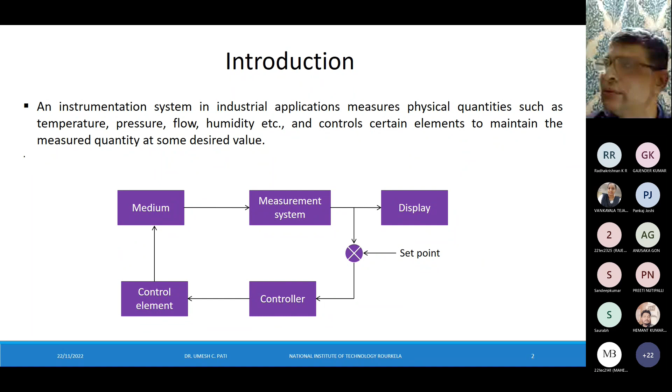So there are signal conditioning and signal processing blocks here. Two independent blocks, but most of the time we say signal conditioning or signal processing like that. But there is a thin line differentiating them. Every sensor requires either one or both: signal conditioning is mandatory, signal processing is optional. Why is it so? Let us distinguish between signal conditioning and signal processing, the thin line dividing both, and the functions under each head.

So signal conditioning provides operations, and as I told, it is mandatory. It transforms from one form to another form or level, so that subsequently we can interface with other modules. Common operations are amplification, filtering, isolation, scaling, and attenuation. The names are familiar to many of you.

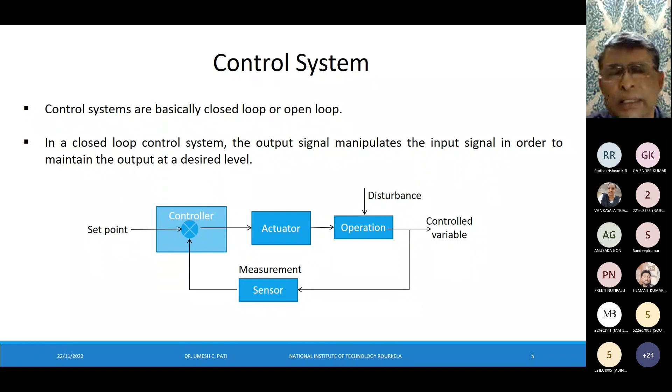This is the disturbance here, and we have feedback of the measurement through the sensor. Comparison is done at the controller, and correspondingly the appropriate, proportional action is given to the actuator. It is only for the disturbances that we do all the operations. Without disturbance, nothing would need to be done. Once you set a variable at a particular point, it would stay indefinitely. But practically this is not the case.

Just an example of what we are going to do. I'm discussing the gradual upgradation from normal industrial automation to IoT, to industrial IoT, and then what is the role. In between, I also discuss the sensors, the classification of sensors, and actuators at the end.

So here is an example of that: a heat exchanger. Almost everyone in this domain knows this. We have got a process stream which has to be heated with the help of the heat exchanger, and the medium is steam. So steam will be used to increase the temperature of the process stream.

Here, as usual, there is a sensor at the beginning, a transmitter, and processing to make it compatible to be sent to the controller. Here is the controller. Different types of controllers can be here, and recently the PC or computer has replaced all the earlier controllers.

We have got a steam flow, and this is the final control element here. Here is a valve. So this process is simple. The valve has to be increased or decreased depending upon the temperature of the process stream, so that the flow of the steam can be controlled through the valve. So naturally, the valve is a final control element or actuator.

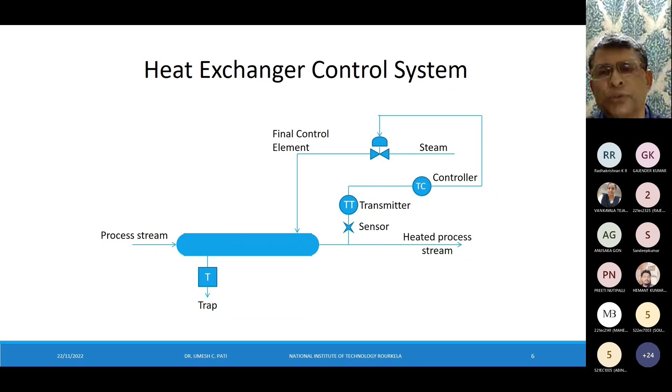And as you have understood, the sensor is the primary element, the transmitter is the secondary element, and the controller is the brain of the control system. All the decisions are made here, and the final control element takes the action. It is just like a slave to the controller. Sensors are just like our 5 senses that we use to assess the environment. Our hands and legs behave like actuators. The controller is the brain.

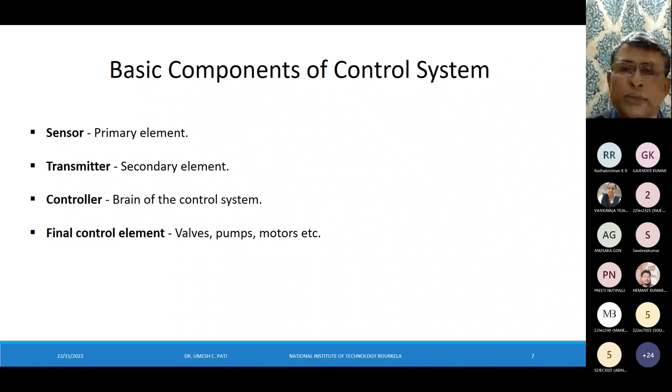So the minimum basic operations are: measurement, measuring the variable to be controlled, which is a combination of sensor and transmitter. Whether it is a simple system or a complex recent system, even with the gradual involvement of IoT, the basic operations remain the same. Then decision: the controller decides what to do and what not to do so that the desired value is maintained, and based on the decision, the action is taken by the final control element.

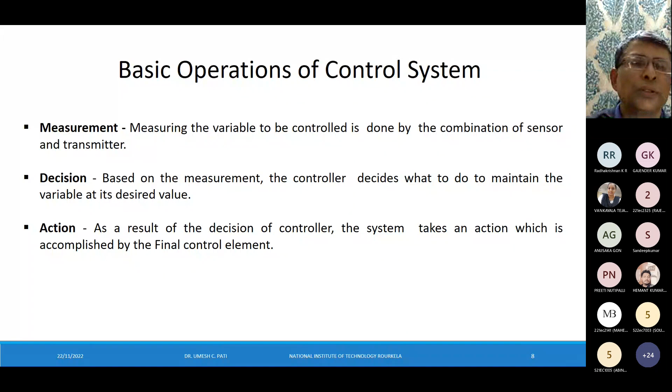And the terms which are important in this aspect are: controlled variable, the variable to be maintained or controlled at some desired value. In the heat exchanger example, this is the temperature of the process stream. What is the manipulated variable? The variable used to maintain the control variable at its set point. The flow of steam, the quantity of steam, is the variable we can control so that the process stream fluid can be at its set point.

Then, as I discussed, the set point is the desired value of the control variable, say 35 or 40 degrees centigrade for the process stream fluid. Disturbance or offset is the variable that causes the temperature of the process stream to deviate away from the set point of 35, to 37 or 38. Then we have to bring it back to the set point of 35 degrees centigrade. These are the 4 important terms associated with any control system, any automation system.

This is a little bit of initial-level discussion. Then we go over to industrial automation. Now the PC has replaced the controller in all automation processes, and it is combined with networking. In that case, a wide range of industrial measurement and control problems can be solved. With this combination of network, data acquisition and control, that is networked industrial automation, we can handle automation of process industries, manufacturing industries, buildings, locomotives, automobiles, avionics and whatnot.

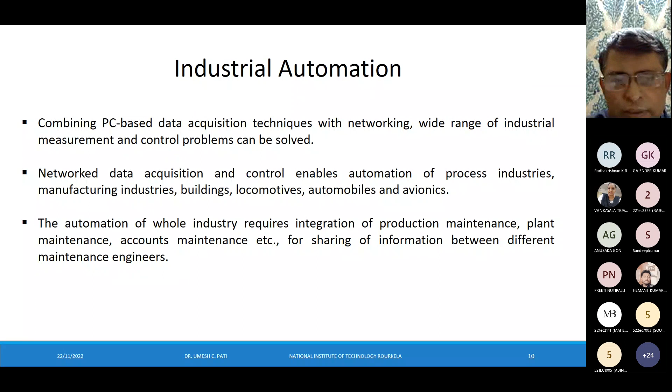What does it require? It requires integration between different levels and different domains of a complete process plant: production maintenance, plant maintenance, account maintenance. All these different domains should be interconnected, and we need this sharing. Then what is the hierarchy model? In this hierarchy model, we require flow of information between different levels, from the field device level, the lowest level, up to the enterprise level, the highest level. I shall discuss the levels later.

In fact, we shall discuss IoT and also industrial IoT. All these changes have occurred, but the basic things remain the same. So there is a 5-level hierarchy in industrial automation. The hierarchy model describes what equipment is required, what network is to be used, how communication between the equipment can be established, what the quantity of information flow should be, and how control can be achieved. So what are the 5 levels of automation? This is the communication hierarchy.

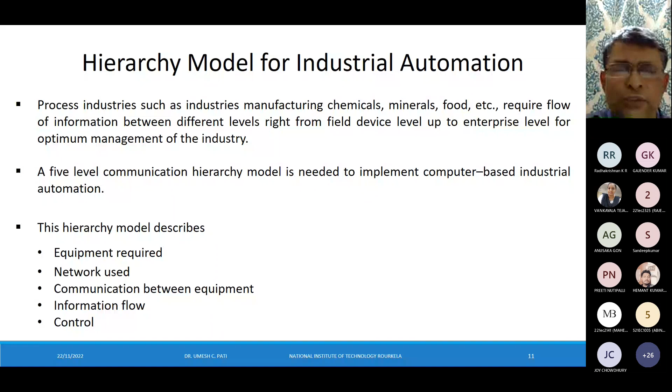See at the bottom. So there are sensors and actuators. They are at the field level. They are the soldiers, workers in a process plant, scattered across the industries. Then after that, there is an IO level, input output level. Third one is the control level. Fourth one is the HMI level. I shall explain this one. And last one is the enterprise level.

We need information flow, communication between all these levels, so that, as I told at the beginning, product quality, product rate at minimum cost, and safety can be achieved. So the 3 points which I have told at the beginning, this is the major reason why we are going for all these businesses.

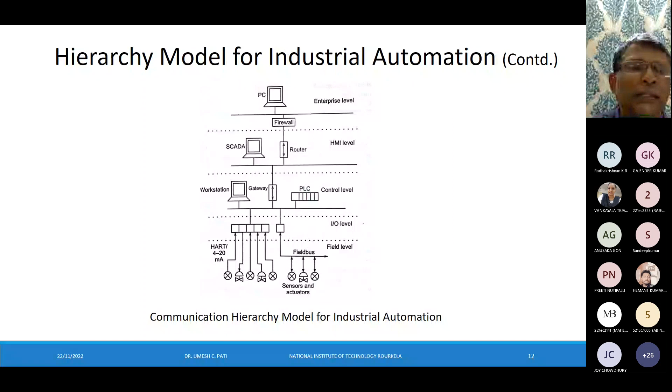So as I told, the initial is the field level. Then IO level already I have told, and HMI level, it is plant management or human machine interface level, HMI. Also it is called plant management level. Some management is occurring. In fact, all the names satisfy their nomenclature. We shall discuss about each one. And last one is the enterprise or corporate level.

So what are the basic functions? As I told, even if we graduate over IoT, industrial IoT, there will be minor changes, but basic construction, basic function will remain same, and levels basically will remain same. So first of all, as we discuss, this is the field level. It is the lowest level in the automation hierarchy. And what are the equipments? It is field instrumentation, that is sensors and actuators, workers for process measurement and control.

So these sensors generate process variables. And what are the process variables? Temperature, pressure, level, flow. There are many more. Major ones are temperature, pressure, level, and flow. And these signals received by the sensors are passed to the input output level. This is the job of the sensor. They pass on the information to the IO level.

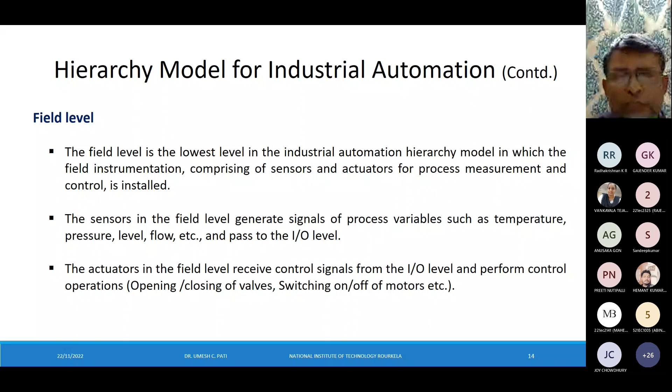Then IO level, input output level. Main function is that it's a buffer interface between control level and field level. It collects input signals from sensors and transmits to the controller. A little bit of processing is supposed to be there. Then the reverse way: collect control signals from the controller, that means the third layer, control layer, and pass to the actuators.

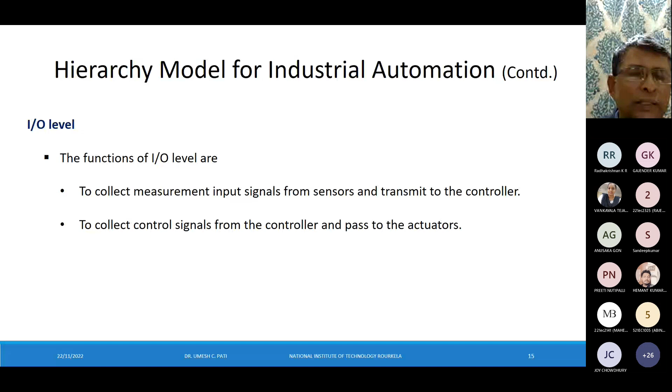Then the more important segment, control level. The inputs from the sensors are processed and control signals are generated. Main decision making is being done here. A few examples are PLC, distributed control system, and now the PC has replaced them. So data from all parts of the industry is collected and presented to the computer. So as I told, this is in-process control. That is control level.

In fact, for small industries, these 3 levels are the minimum, to reduce the cost. But for big industries, like the Rourkela steel plant here, we need 2 more. What are the 2 more? The next one, 4th one, is the plant management or HMI level. In this plant management or HMI level, it collects plant data from the control level. All the data are being collected here. Mark the words, human machine interface or plant management.

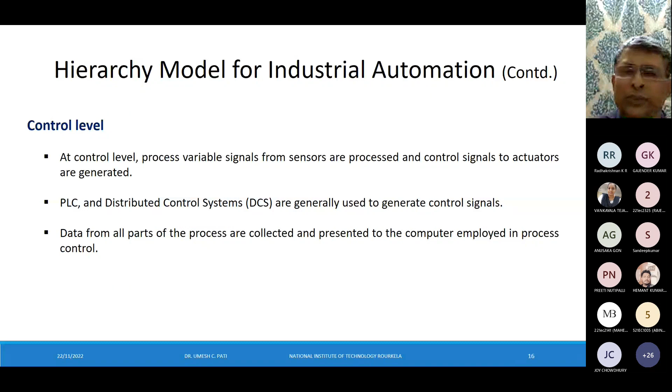An example of that is SCADA, supervisory control and data acquisition. This program displays the plant schematic, that means all the variables on the monitor screen in the control room. So the operator can sit there and have a look over the status of the plant, all the variables on the screen. What it displays are process variables at different field points, not only a single point, across the process plant, and also it gives a warning if some threshold value is exceeded.

That means pressure goes above the upper limit, which can give rise to accidents. So all these things have to be done and displayed in the HMI level. The operator will be able to know everything. That is the reason why it is named the human machine interface level.

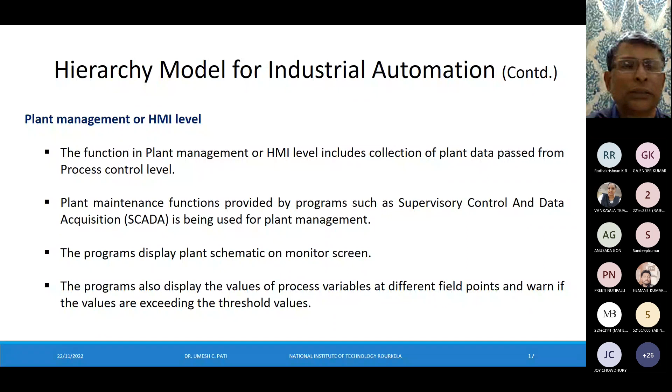The last one: we have our product. It is of best quality. Rate is good, but we have to market it. We cannot keep it in our store. So this is the place, enterprise level. This is the office management world. That means it will be accounts and sales.

So in that level, what are the things we require? Spreadsheet, text editor, emails. So that is what the job is there. So that is the 5 hierarchy model for the automation. And here, as I told, 5 levels are necessary for large industries. And the ability of different networks is also different, and it can be classified to data network and control network.

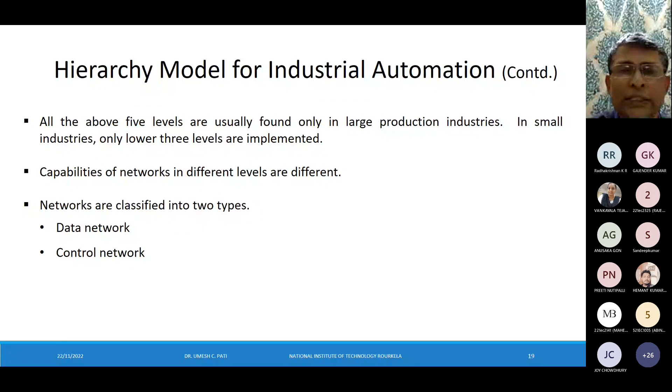Let us distinguish between data network and control network. So data network, in this case, data transported is huge in volume, but not time critical. Time criticality is not there, but amount of data is too much. And the network is used intermittently. Where this can be used, let us say enterprise level. So you can send a lot of volume of data, but sometime here and there will be okay. And it is also not continuous basis.

In contrast, control network, amount of data is less, but it is time critical. That means it is the control signals which are being sent to the actuator. And it is time critical, amount is less, and the network is in constant use. A particular variable is constantly monitored and controlled. Example, temperature. So that is data network and control network. So basically this structure remains same for all.

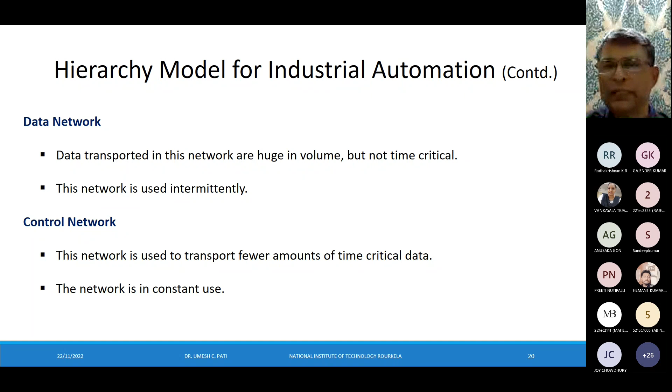Then we come over to the step ahead. That is the inclusion of Internet of Things. I shall just give a bird's eye view, glance over this, because we are having a gradual transition to the recent automation process. So these days, IoT has become a buzzword. So billions of people buying mobile devices, and it gives rise to immense processing power, storage ability, capability, and knowledge.

So all sorts of physical devices can be interconnected by IoT, like appliances, vehicles, even human beings, with the help of sensors, actuators, and software. And that becomes a network. And in this process, the physical devices communicate, interact, process, and exchange all the things they are supposed to do among themselves. And this technology supports that.

So what is the IoT definition by IEEE? It's a self-configuring and adaptive system. And it consists of sensors and smart objects to interconnect all the things. And by doing that, what we achieve? These devices become intelligent, programmable, and more capable to interact with humans, human-machine interface. That is what the ability will increase.

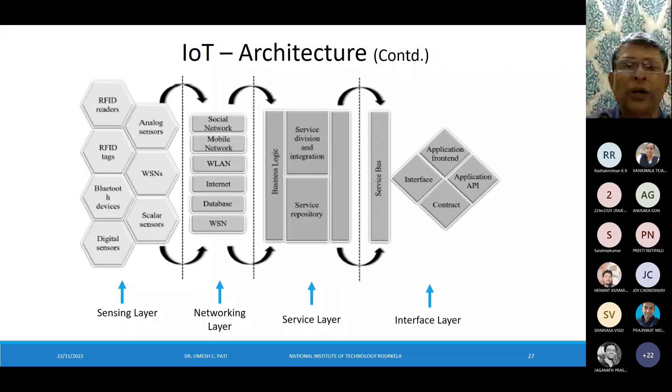So as I told, heterogeneous devices have to connect. The layers of IoT: sensing layer, networking layer, service layer, interface layer. So let us discuss a little bit on each layer briefly and have a look at this IoT architecture. Sensing layer has got few devices. Networking layer has got few. Then service layer, then interface layer. Let us discuss with reference to this sketch these different layers of IoT architecture.

So the word is sensing. Nothing new to us at this time. So it has got IoT devices. Already I have discussed about the field layer. That is almost similar to that. So IoT devices are equipped with sensor nodes. All the devices, what is there in the sketch? We have just discussed Bluetooth devices, scalar, analog, digital, all sorts of sensors are there.

The sensor node has the same function as the sensor has to do: sense the information, transmit it real time, and communicate among themselves. It consumes low power and does not require much data rate connectivity. Here the sensor nodes form the WSN, and based on the application, the sensor nodes can be grouped together.

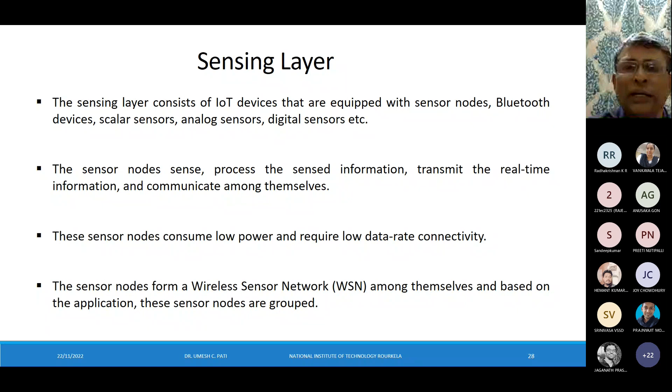Then the next one is the networking layer. This layer helps the IoT devices to share the information, and the amount of data generated at the lower level is handled by this layer. It consists of social network, mobile network, wireless LAN, internet, and database.

It should have low latency. It should give rise to scalability. These are the requirements of IoT applications. We should take care of bandwidth requirements, energy efficiency, as well as security. IoT security, in this case, comes in.

The service layer integrates the services and applications, and mainly it operates on the overall workflow: information exchange, communication, storage, and management. Also in this layer, one important task can be done: predictive analysis. We can predict different aspects of machines and devices.

The next one is the interface layer. As you have interoperability, different types of devices are there, and interaction has to be among themselves. Day by day it is increasing, it is not static. The more devices we have today, it increases, and that creates difficulties in connecting, communicating, and operating. This layer systematically streamlines the management and interconnection. So basically, these are the layers, giving a little idea about IoT.

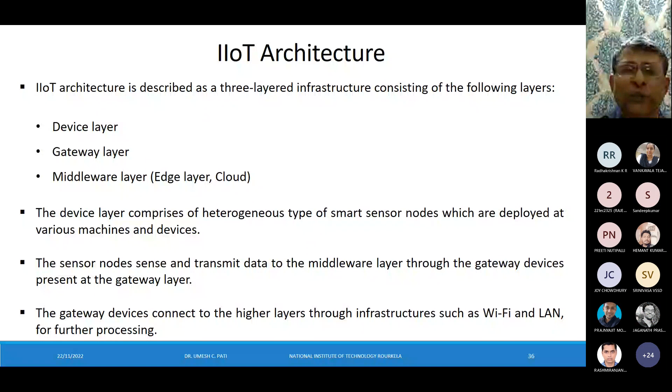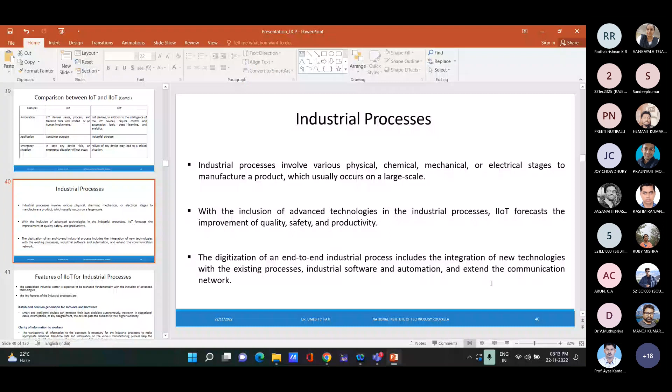So we have discussed industrial automation, then IoT, then industrial IoT. Let us discuss a little bit of industrial processes. That means it covers all the ranges: physical, chemical, mechanical, and electrical. All the processes have to be combined together for a product, as I have told, on a large scale, at a certain production rate.

In these cases, industrial IoT, everything again it sticks: product quality, safety, and production rate. As I have told at the beginning, whatever things may change, these three factors remain unchanged.

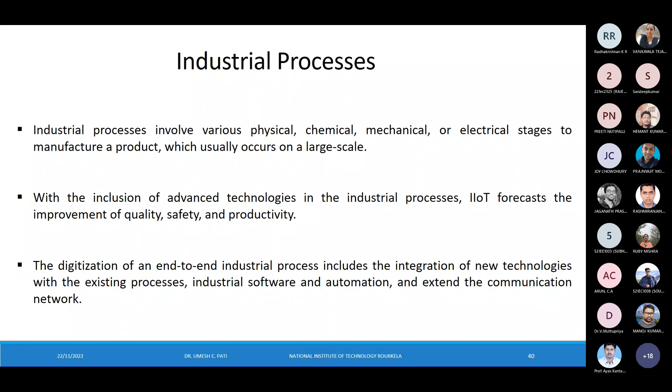So what should be the key processes and features of industrial IoT? First, distributed decision generation for software and hardware. Smart and intelligent IoT devices can generate their own decisions autonomously, and in case of interruption, the decision of the higher level may be needed.

Second, what is required for industrial processes involving IoT is transparency of information to the operators. Real-time data and information on the various manufacturing processes helps the operator identify errors, malfunctions, and degradation in the processes.

Then the word interoperability. A lot of devices from different manufacturers are used here, including sensor nodes, intelligent machines, and people. They should be able to communicate, transfer, and connect with one another using a standard communication protocol.

And last, technical assistance. It will help the operators to make decisions independently with minimum or no human intervention.

So industrial IoT connects the industries and other organizations with the help of internet. This is the future architecture, various layers of a futuristic industrial plant. Have a look at this.

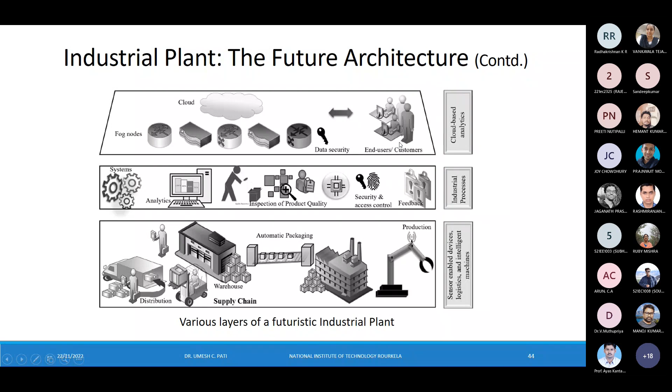The layers are connection layer, conversion layer, cyber layer, cognition layer, and configuration layer. A brief outline of the functions has been mentioned here. Let us have the detailed description now.

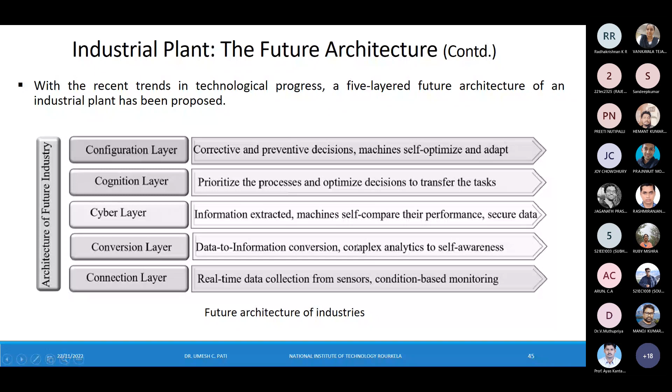So the first one is the connection layer: the sensor node, machine, and other physical devices, connected through internet. Earlier we discussed actuators and sensors; here it's almost the same, and the operation is also the same.

Continuously monitor the autonomous operations, in normal as well as hazardous environments. The main concern is that health hazards can be checked.

Then the conversion layer, almost similar to the earlier case: extract meaningful information from the collected data. From the first layer it collects the meaningful information, and then does complex analysis of the data. How does this help us? Estimate the health of the machines.

How long it will operate, and in fact the lifetime also. So health of the machines, predict fault also - from the history, from the previous assessment, it can predict. Then forecast the remaining lifetime of machines. This is the important task, health monitoring - status of the health of the machines, all sorts of business it has to do in this layer.

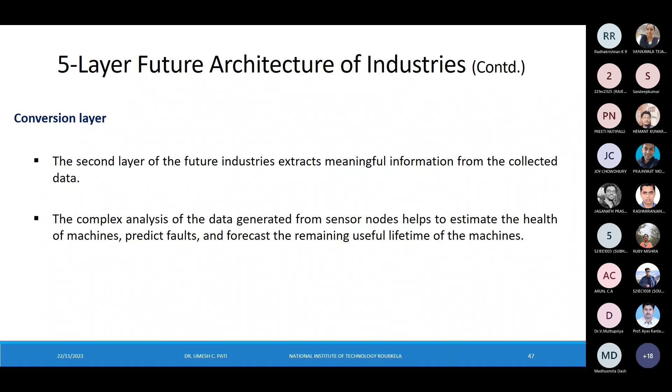Then the cognition layer: diagnostic and decision making. In this layer, complex analysis, remote monitoring, and integrated simulations are supposed to be done. The analysis helps us to prioritize and optimize the decisions.

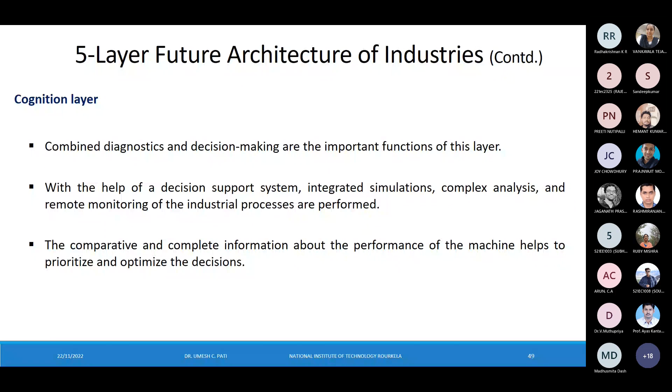Complex analytics applied here can predict faults and downtime. It also has important applications to predict market analysis and future demand of users, forecast new business opportunities from market trends, and how we can improve the product.

Let us come over to industrial sensing. As usual, monitor and control. Actuators combined together, monitor and control.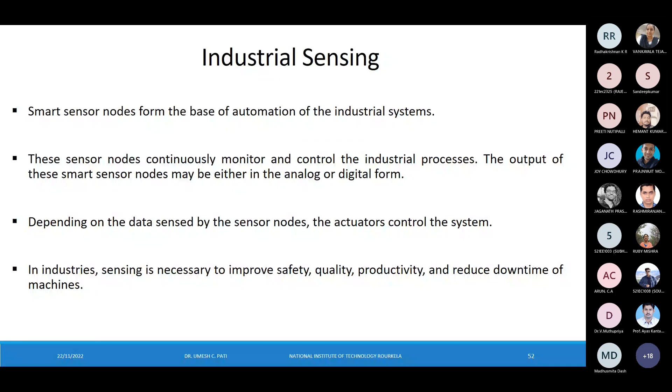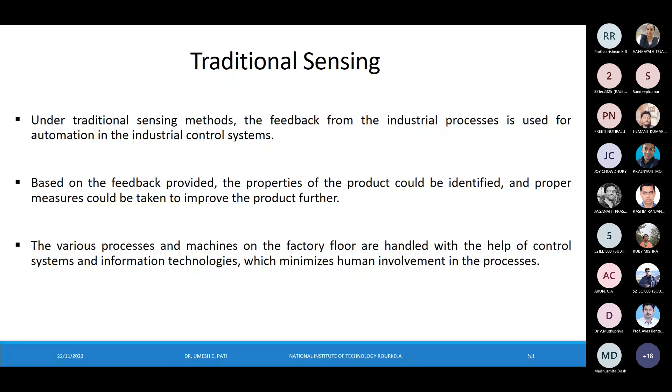Then traditional sensing, a little bit developed. The things are the same but a little more developed compared to previous cases, which again minimizes human involvement. An example is robots can be programmed and deployed to perform tasks in hazardous conditions. In these cases, the initial cost of automation is relatively high.

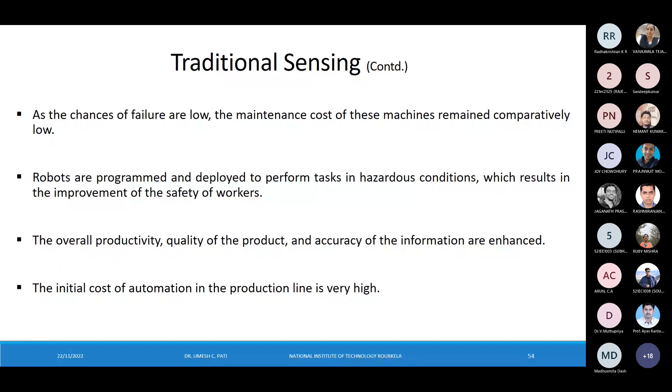A bit of development further, contemporary sensing involves smart sensor nodes connected to the internet. Terms like cloud and edge of the network come into picture. Here the analysis helps with product lifetimes, safety condition improvements, and reliability. In these cases, wireless technologies are important.

In this particular context, the smart sensor node has a microprocessor at its core. Smart sensor nodes also minimize power consumption, and can delete data at periodic intervals to save memory space. Smart sensor nodes are small in size and can handle large amounts of data. These are the plus points of smart sensor nodes.

A definition of the smart sensor node can go like this: it gives a specific output when interfaced with the hardware, and it can also range and calibrate data through a system, autocorrecting. Everything can be on its own. It transforms real-time data into a stream of transmission, and the gateway helps in this process.

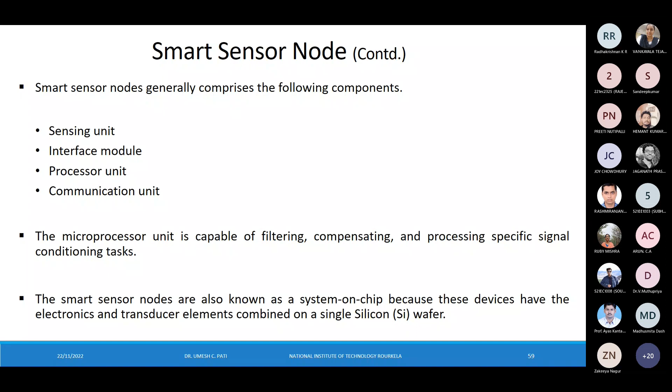Healthcare: ECG, EMG, oxygen saturation, galvanic skin response. Retail: proximity, RFID, GPS and light. Supply chain: motion, temperature, humidity, acoustics. Manufacturing: smoke, temperature, pressure, and proximity again.

Let us discuss a bit the application of these sensor nodes in all these 5 important domains. First of all, agriculture: these applications are used to monitor and automate the agriculture process, monitor as well as automate. It can also decide the amount of fertilizer and pesticides etc. to be applied, and overall, like machine health, it will decide crop health, what is required for steady health and steady growth of the crop. It can also tell the farmer the best time of cropping.

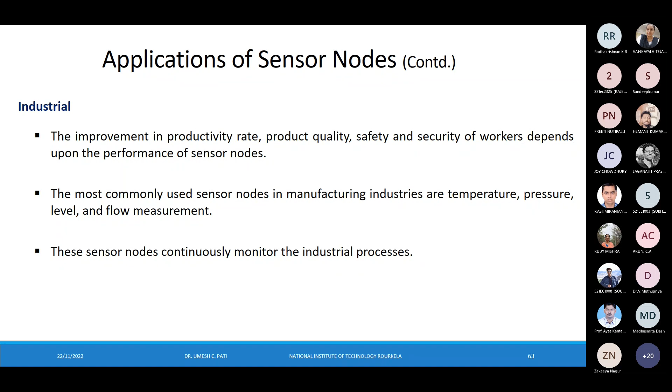So monitor and track logistic and related activities, and it will help us in all the marketing activities, optimize supply lines, and also avoid theft or misplacement. So sensor nodes will avoid misplacements, and overall it increases the efficiency. We can also have proximity sensors, vibration sensors, RFID tags in this supply chain.

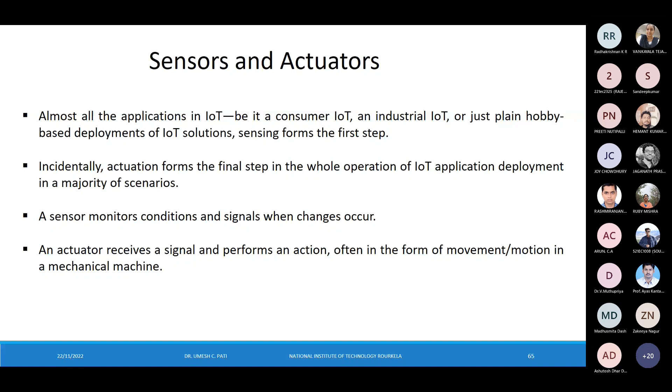Then let us come to different types of sensors and actuators. This is the last segment of the discussion. So whether it is IoT, consumer IoT, or industrial IoT, we have discussed that sensing is the first step and actuation is the last step. We have discussed sensors and actuators earlier, so already we have discussed these things. A few lines about the sensors.

So characteristics of the sensors in general. First of all, sensor calibration. This is to remove sensor errors. Inherently some sensors have errors from design. The error is how much the expected value is and how much the output value is. The expected value can be obtained from an ideal sensor under the same operating conditions, which is perfectly ideal. So in that context, we can enhance the accuracy of

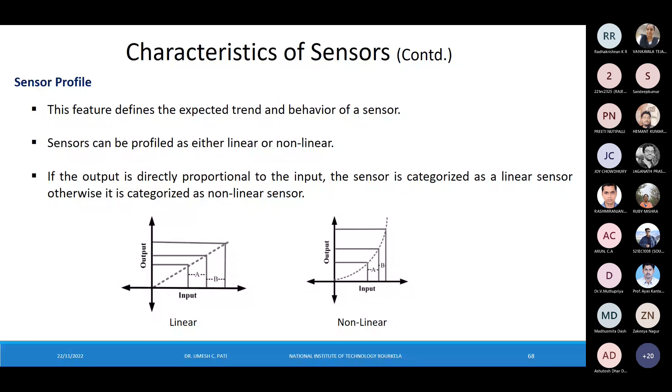The accuracy of the sensor. In fact, the degree of correctness or closeness a sensor can quantify. If the actual reading is 100, and one gives 99.5 while someone gives 103, then the earlier one is more accurate. Sensor resolution: the intensity or level of detail it can capture, 3.25 in comparison to 3.32. So it has more sensor resolution.

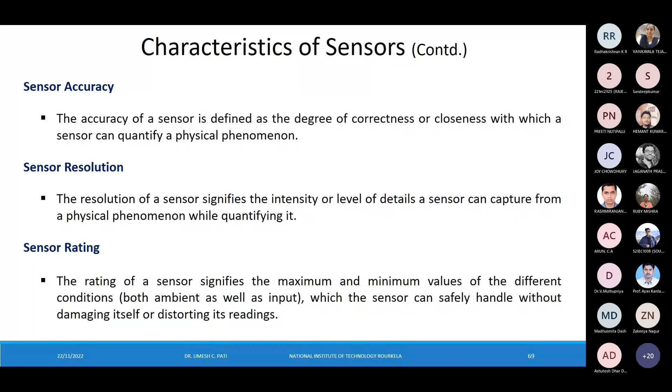Rating: the maximum and minimum values of the different conditions which a sensor can safely handle. If the rating is up to a maximum value of 200 degrees centigrade and it goes beyond that, there is every possibility that it will damage the instrument or malfunction and not give the reading accurately. Many of these sensors are supposed to operate in a particular voltage range. If we exceed that, there is every possibility of damaging the circuitry, knowingly or unknowingly. If there is any impulse or something else, there is a possibility of damaging this.

And output, the last one. It can be analog or digital. We have already discussed analog and digital, nothing much to tell about that. Then another classification: power requirements, sensor output, or measured property. A little bit more discussion on that.

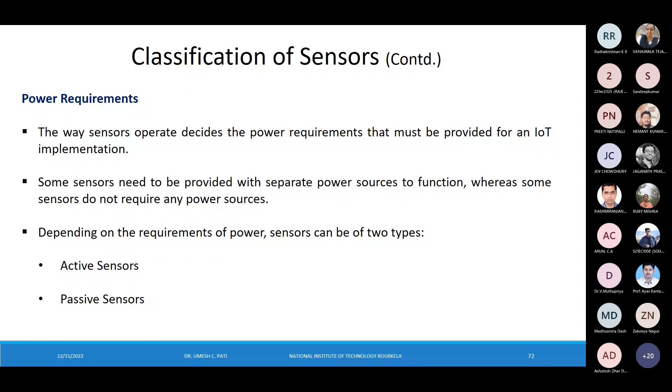Power requirements. Some sensors need a separate source of power, whereas some sensors do not. Based on this power requirement, they are divided into two categories: active sensors and passive sensors. Active sensors do not require it. That means they can work independently on their own, converting one form of energy to another, like a photodiode, as in the example given. Passive sensors need it; otherwise they cannot operate. The example is a thermistor, where an external voltage source is required to measure the resistance. That is the division by power requirement.

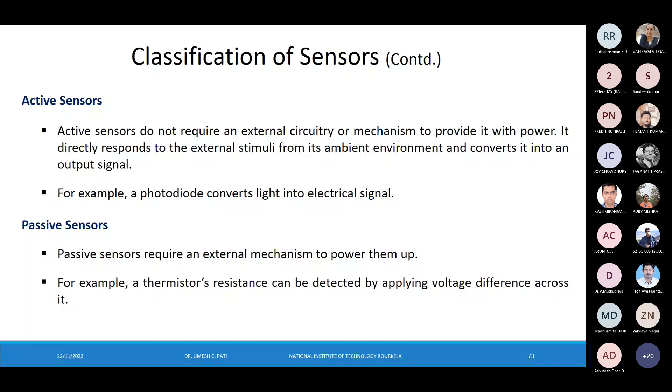Then depending upon the output. All modern-day processors are digital, so digital sensors are preferable. But all sensors produce analog signals. So for any IoT node, we need an analog to digital converter. Correspondingly, based on the output, sensors are divided into two categories, analog sensors and digital sensors.

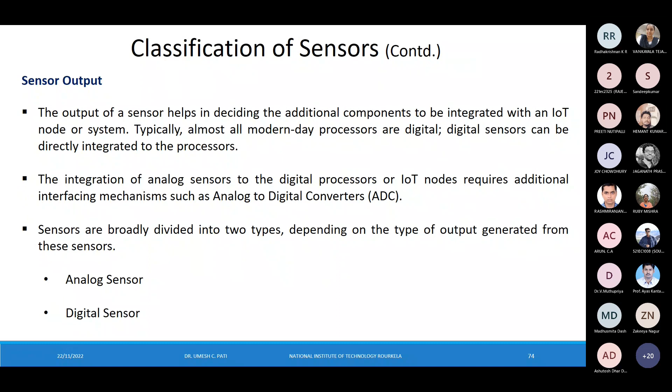So as the name indicates, each output is proportional and it is continuous in magnitude. All the physical quantities that we have seen come under analog signals. But there are digital sensors which output in discrete time, amplitude, or both. So it can be 1 or 0 for on-off, but it can also produce a single bit or 8 at a time, forming a single byte. One is for serial transmission, another for parallel transmission.

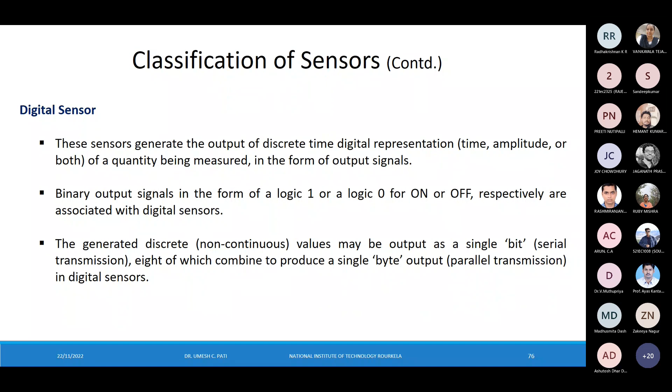Then depending upon the measured property, sensors can be classified. So this is where a decision has to be taken. In those cases, a few properties have variations that can be quantified as either temporal or spatial or both. Examples of only temporal variations are ambient temperature and atmospheric pressure. Spatial variations we will take care of later on. And sound and image have both spatial as well as temporal variations. So depending upon which type of signal data we are measuring, sensors can be divided into two types: scalar sensor and vector sensor.

In those cases, only the magnitude of the signal is sufficient to characterize the phenomena, which has only magnitude. We have already given pressure, temperature, strain. Spatial information is not needed in this type of measurement. That means whether you are changing the direction or orientation of the sensor, it hardly affects it. That is a scalar sensor.

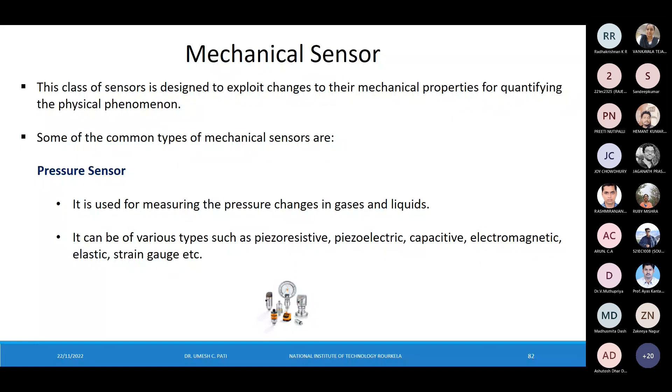The next one, flow sensor. Particularly when you speak about flow in process plants, it is mainly liquids or gases. Volume flow rate. Mass flow rate is less used, maybe for ground particles on a conveyor belt, but volume flow rate of liquids and gases is extensively used. The use is coolant and lubricant supply of plants. Just as an example, we need to monitor how much supply is being done.

These flow sensors tell us if there is any flow interruption. If there is a flow interruption, it can cause damage or downtime, and that will be restricted. So it is simple monitoring as well as precise flow rate measurement. Common examples are orifice plate, nozzle, venturi tube, electromagnetic and ultrasonic, etc. There are many more. One more example is the rotameter. Have a look at this sketch of a rotameter.

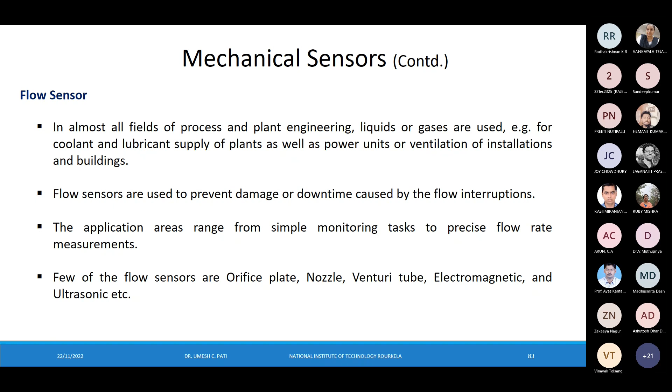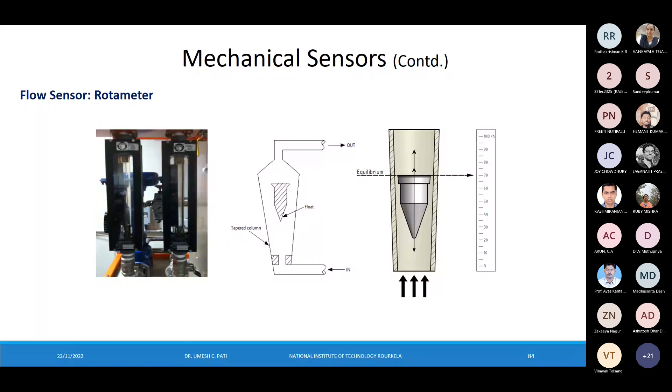Electrical sensors. After the properties we have discussed come electrical sensors. They depend upon the electrical property of the objects. Few of the known sensors are the inductive sensor, and it is free from any wear and tear. It is also insensitive to vibration, dust and moisture, a plus point of the inductive sensor, and it invariably detects all metals. It has got a large operating range and it needs little protection for harsh industrial environments.

Then one more common one is the capacitive sensor. Again, it is non-contact detection. Inductive sensors have a restriction to only metallic objects, but here it can detect non-metallic materials as well. We can find this application in wood, paper, glass, plastic. These are the common industries where you can find the use of the capacitive sensor. And also it has got high noise immunity. These are a few of the salient features of the capacitive sensor.

Then one more electrical sensor under this is the magnetic sensor. Detection of position, but without contact. And when there is no contact, it avoids wear and tear. It also covers a large sensing range. It can also detect through walls, whether stainless steel or any sort of that. And the magnetic sensor has got high mechanical stability, which is required when there is shock or vibration.

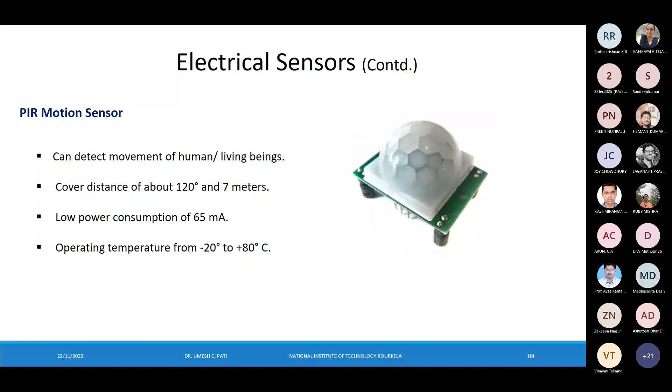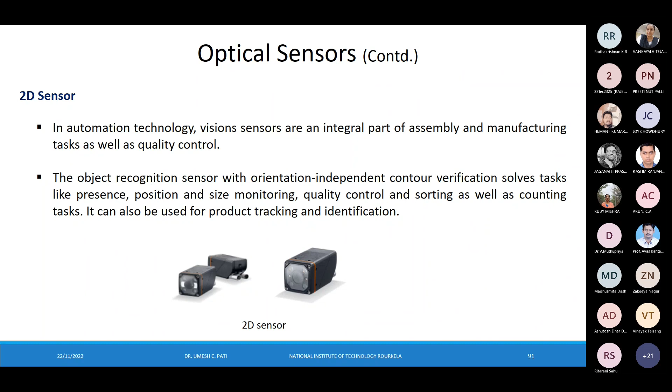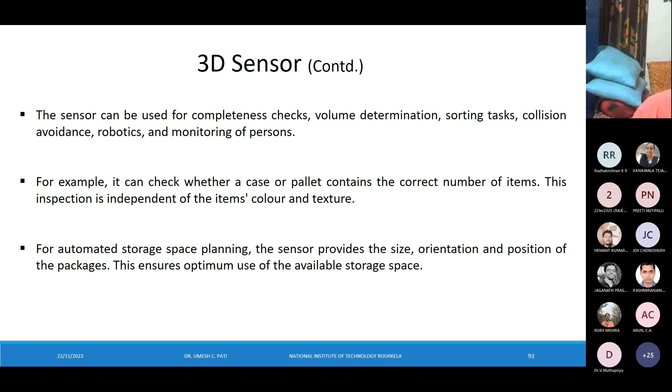It can also check whether a store box contains an adequate or correct number of items or not. And we are not bothered about the color and texture of the product; still, it will count. And when there is an automated storage space, the sensor provides the size, orientation, and position of the packages. So in that context, we can optimize the available storage space. So this is about the optical sensors.

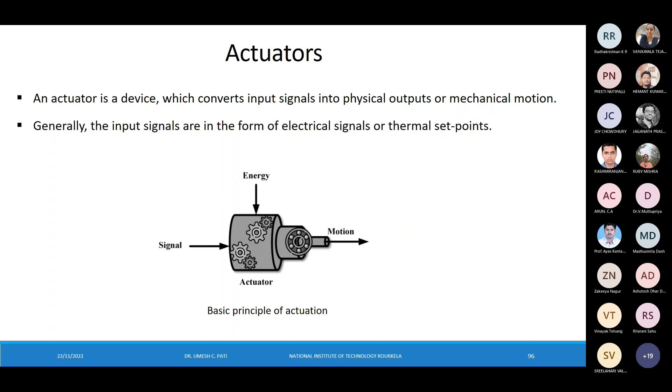So we have discussed a lot about these sensors, then the turn of actuators. So already we have defined the actuators, physical outputs or mechanical motion we get from the input signals. And we also discussed that processor or controller is responsible for sending electrical signals.

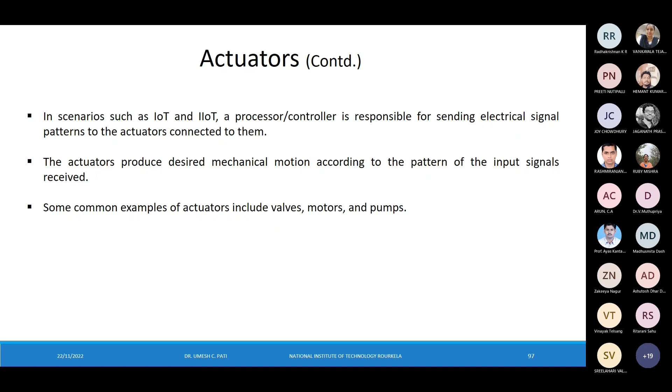So few examples already I have told: valves, motors, and pumps. Just it is refreshing because these things we have discussed at the beginning. Now at the end, also the same thing one has to discuss. And this control signal, it can be digital or analog. So most of the cases, it's a mechanical motion at the end.

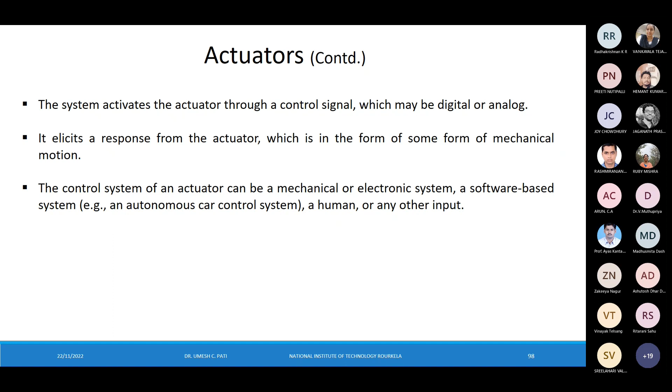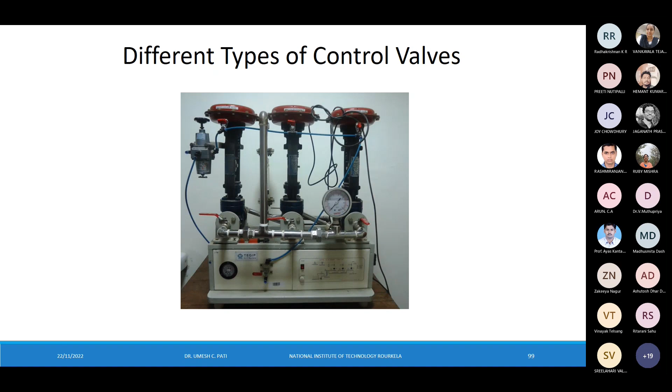So in fact, this is just an example of control valve, which is also an actuator. Different types of control valves work, that is linear, equal percentage, or quick opening. Control the flow, and much of the automation flow control can be achieved by the control valve. This is just an example of that.

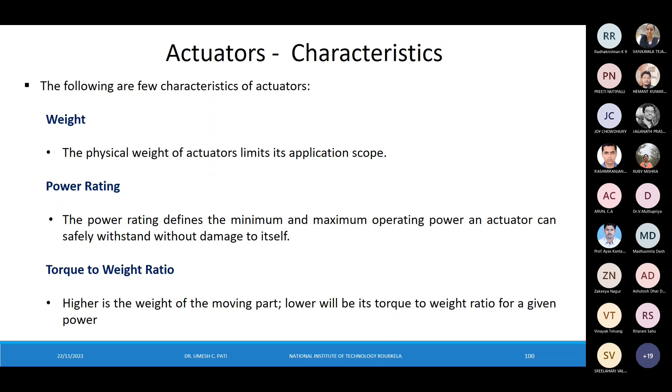Then power rating. This also defines minimum and maximum operating power it can safely withstand. So that we have to decide in which application. Then torque to weight ratio. If the weight of the moving part is higher, lower will be the torque to weight ratio. So that is a defining factor as far as these actuators are concerned. The clients, the customers can choose one.

Then various actuators, like the sensors we have defined. Here also, there are different types of actuators used in IoT, and the names are on your screen: thermal actuators, hydraulic actuators, pneumatic actuators, electromechanical actuators, shape memory polymers, soft actuators, and magnetic actuators. Let us discuss in brief about these actuators.

Like thermal sensors, here also is thermal actuator. It converts thermal energy into kinetic energy. And it's a complete package, sensing and actuation. It senses temperature and compares it with the set point. And depending on the set point, the control can be made. And what are the applications of thermal actuators? Cooling control, freeze control, boiling point control, all related with temperature or thermal properties.

And few examples are thermostatic actuator. This is a control valve opening or closing depending on the temperature variation. And generally this thermostatic actuator can be used in boiler controls, room heating controls, and similar temperature controlling applications.

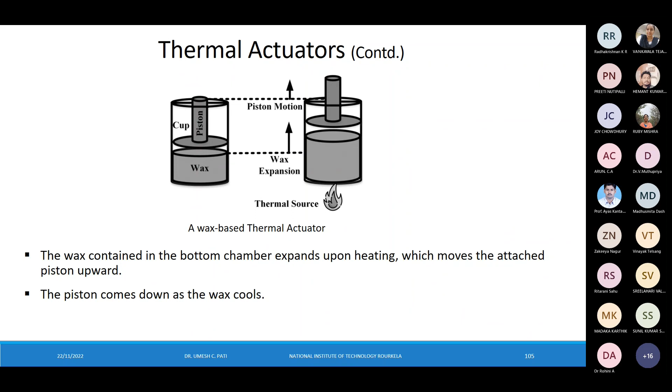What are the salient features? These actuators do not need any power supply, as we have seen from the example. Sensing and actuation in a single package, only wax in the example we have seen. In those cases, it is very easy to deploy and unnecessary components are not required. But the drawback is that it has got large hysteresis lag. Slow speed of the moving piston compared to the change in temperature is one reason.

Then the next category is the hydraulic actuator. As the name indicates, it operates by exploiting the incompressible property of the enclosed fluids. And as understood, it converts hydraulic energy into mechanical energy.

And the applied pressure on the fluid will convert it to motion, and the motion will move the piston. In fact, hydraulic actuators are based on Pascal's law, which arises due to the law of conservation of energy. Pascal's law states that the pressure applied on an enclosed fluid is transmitted equally in all directions. Hydraulic actuators are of two types, linear and rotary.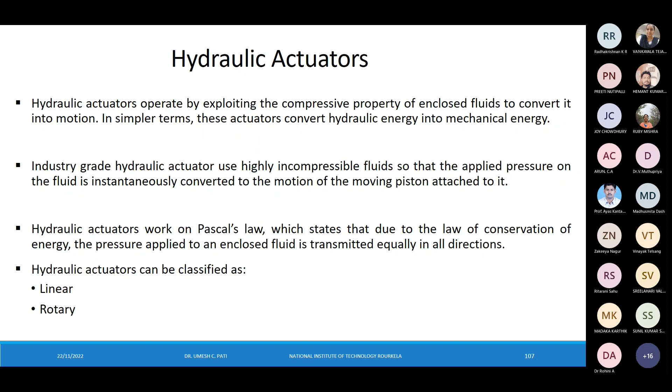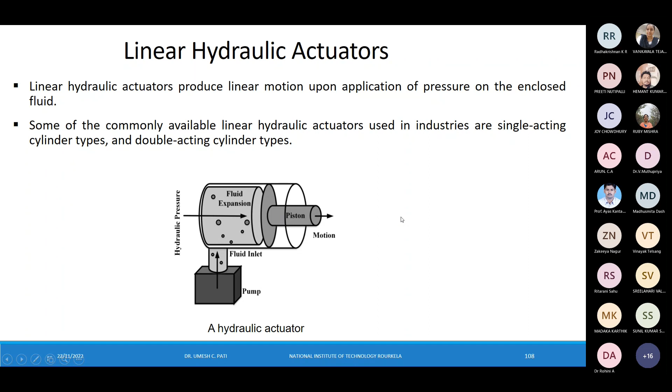Corresponding to linear motion, there is also rotary motion. As the name indicates, it produces rotary motion. Examples are the rotary vane type actuator and rack and pinion type, which convert the mechanical arrangement into rotary motion in a similar way to what we have seen for linear motion.

Then some salient features of hydraulic actuators. It provides a high torque to weight ratio. What is the importance of this? We can lift or move heavy weights and the application of power will be less. It is also used where high speed of operation is needed. It is also resilient, meaning it is not affected by overload changes, and as soon as the overload condition is removed or rectified, it can resume operation.

But the drawback is that they require careful maintenance and periodic checks. What for? There can be a possibility of fluid leaks. The fluid being used can leak and the hydraulic pressure cannot be maintained. That is the minus point.

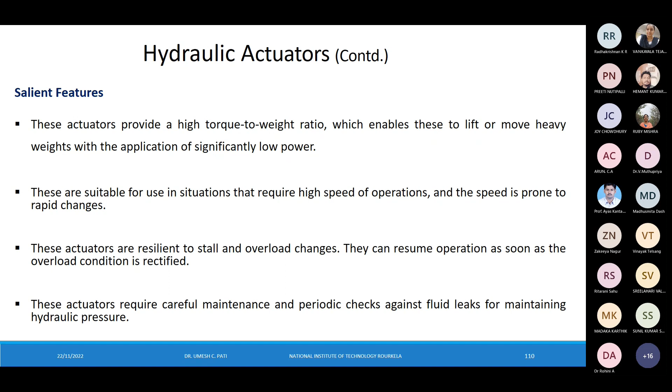Then, in line with hydraulic, the next one is pneumatic actuators. That was hydraulic power; now it is air, pneumatic power. Compression and decompression of air. Like the hydraulic actuator, it will also produce linear and rotary motion. These actuators are generally used in valves, and valves, as you understand, control the flow of liquids or gases.

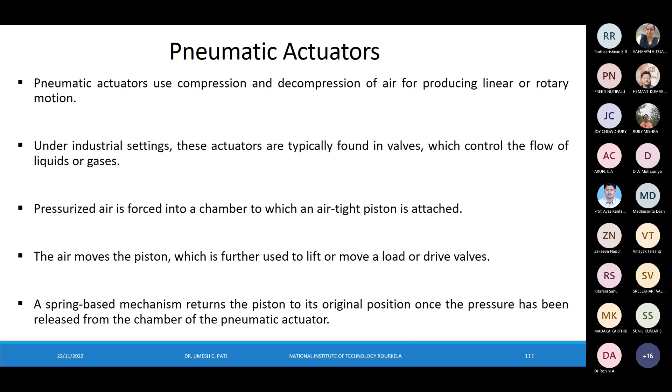It has got an airtight piston and pressurized air, like the hydraulic setup, just with the fluid replaced by air. So pressurized air and an airtight mechanism. This air moves the piston and it can be used to lift or move the load. After the removal of the pressure, a spring-based mechanism returns the piston to the original position so that it is ready for the next use.

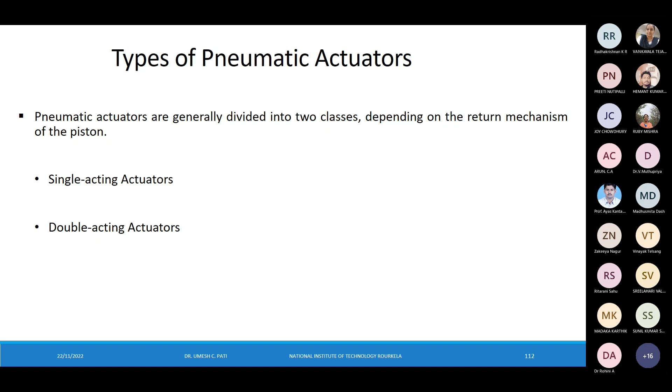And correspondingly, the piston will have a forward motion, whether it is pressurized air or air sucked out of the case. In both cases, like in the hydraulic actuator, a spring-based mechanism is responsible for restoring the piston to its original position when the pressurized air is removed.

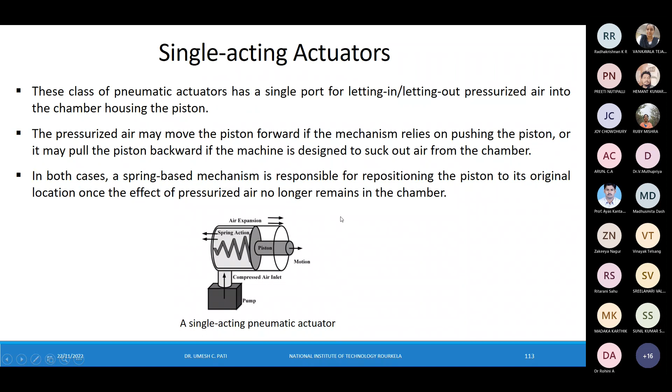A few of the salient features of pneumatic actuators. They are simple; only air is needed. So they are simple to design, maintain, and easy to use. The main plus point is that they are safe to be used in environments with high fire hazards. No electrical components are required, so there is no chance of fire hazard.

In contrast to hydraulic actuators, there is no leaking fluid, and maintenance is quite easy in comparison. As there is no possibility of fluid leaking, there is no need to clean the surroundings of machines and systems, which also saves cost and time. One drawback is that, in comparison to fluids, air has lower compressibility, so it is relatively less efficient.

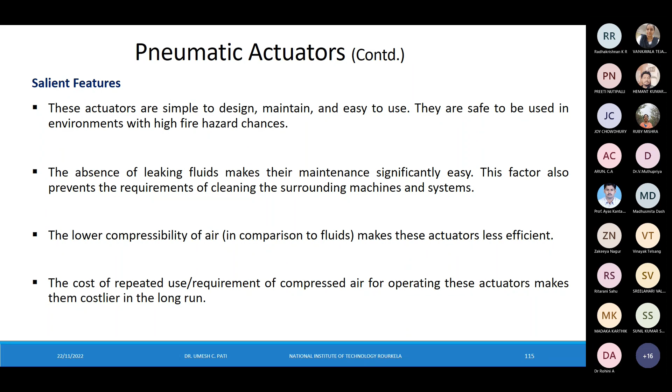Then the next one is electromechanical actuators. The word is electromechanical. It converts the rotary motion of electric motors to linear motion through gears. There is a thread and a lead screw attached to the motor shaft.

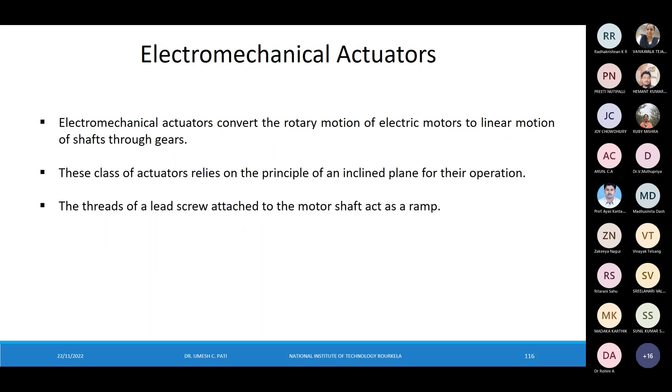It is active. Let us see an example so that we can understand better. If we give a rotary motion to the lead screw, it becomes linear motion, so that loads can be moved over large distances.

Motors can be of different types: DC, induction, or brushless. And gears are generally used to reduce the speed of motors and also couple them to loads.

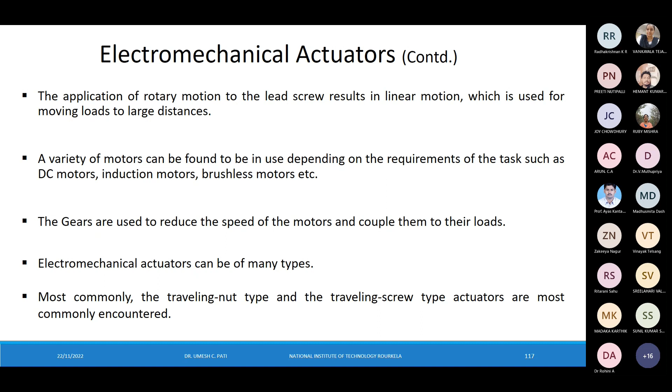There are two types: traveling nut type and traveling screw type actuators. Both are linear, traveling nut and traveling screw. So let us have a look at the traveling nut type actuator.

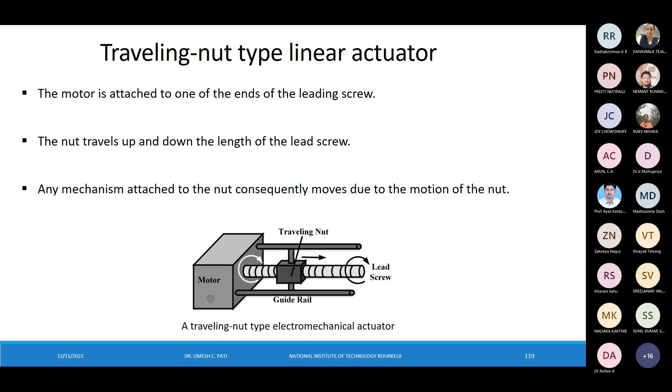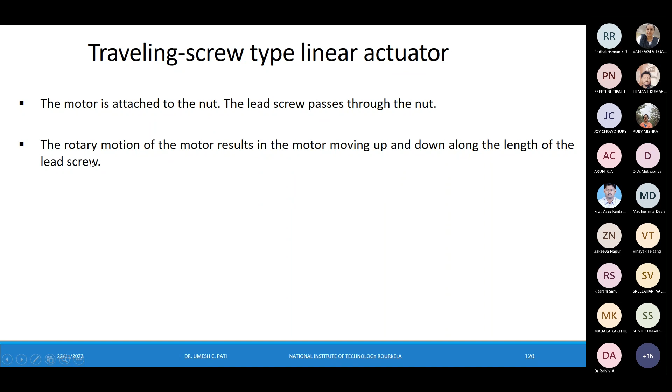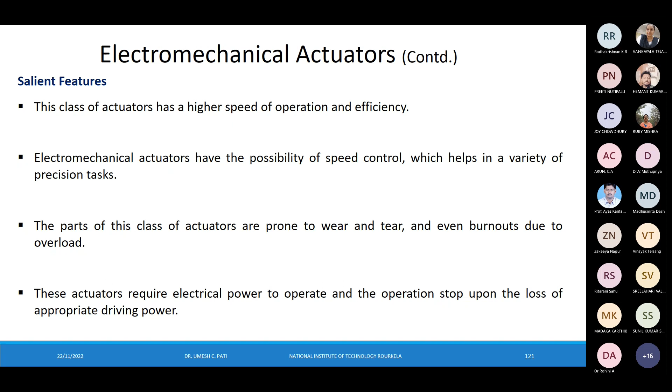Then what are the salient features? It has got higher speed of operation and efficiency. We can control the speed so that precision tasks can be made. But this type of actuator, where there are moving parts, is prone to wear and tear, even burnout. And these actuators require electrical power, and that involves additional cost. If we do not have additional power, we cannot serve.

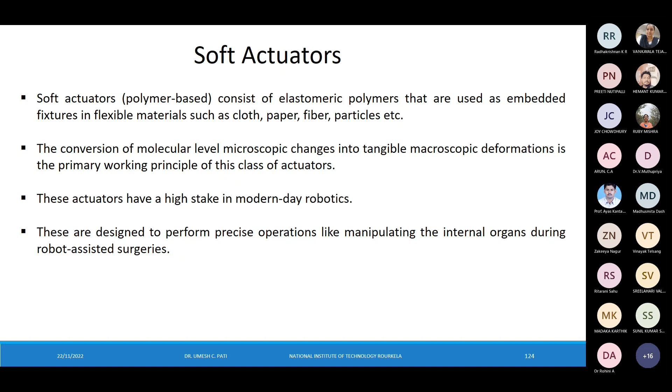Am I audible? Yes, yes, you are very much audible, Professor Umesh.